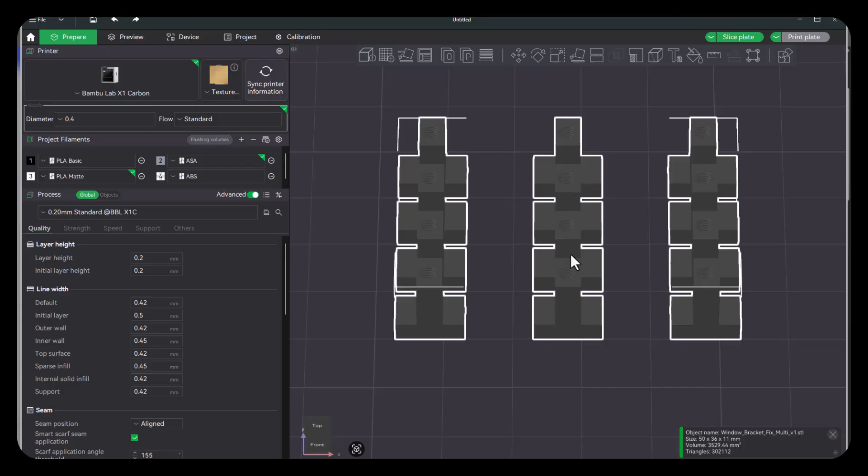There's different ways to look at this, but I'm going to zoom into it and rotate this so we can see what that looks like. So there's the 12 items, and I've got them selected right now, so it's kind of hard to see. I'll unselect that. Now you can see all of this.

Now, the thing that I did, since he was recommending PLA, I decided to go ASA, and I knew I needed a little bit more precision with these, because if you're new to 3D printing, threading, when you try to print threads in this orientation, it's not necessarily the most precise print. So you'll see in James's article, he's talking about using a tap to make these threads more precise, and it works fantastically, by the way, and I'll go through that in just a minute.

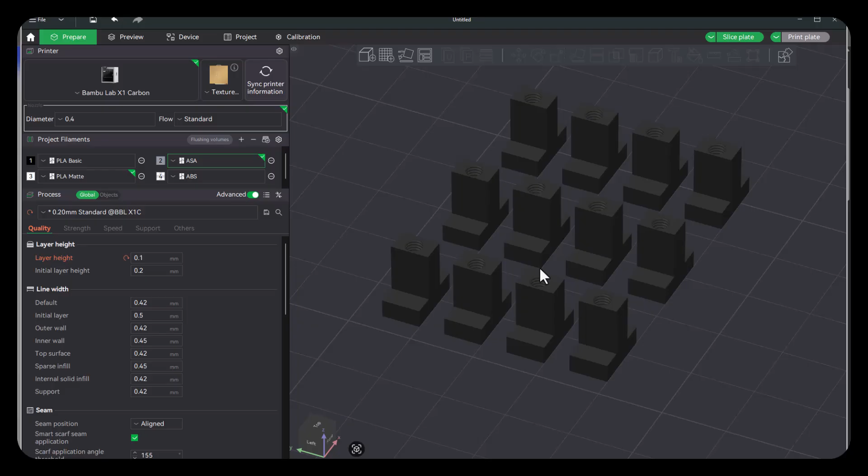One of the things that I did is I changed the layer height here to 0.1. That's usually the lowest that most printers are going to support. Your printer may vary, but I changed that one, and also I decided to use ASA for my filament, so you can do that by selecting the object, right-clicking on it, change filament, and I chose my ASA.

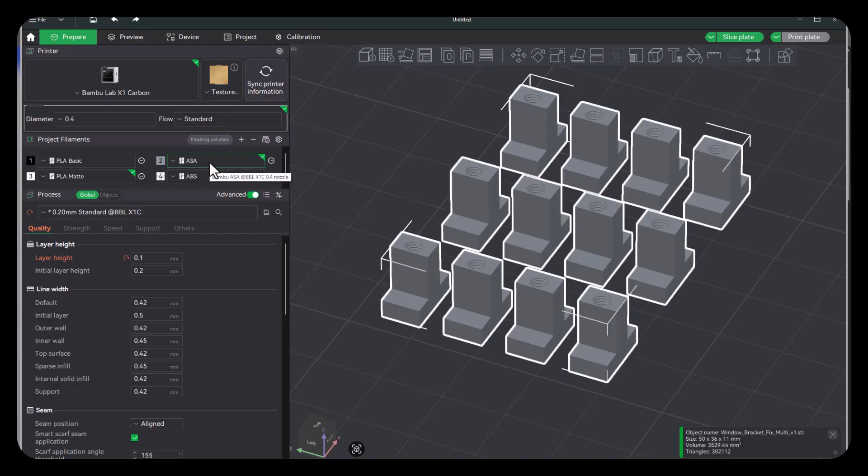Now I have what they call an AMS. It's an automatic filament feeder system, basically, so I can have 4 different spools of filament, and you'll see here I've got a PLA basic in black, a PLA matte in white, a gray ASA. I chose to use gray for that, and notice that my model changed once I selected the filament I wanted to use. That's more representative of what it's going to actually look like when it's printed.

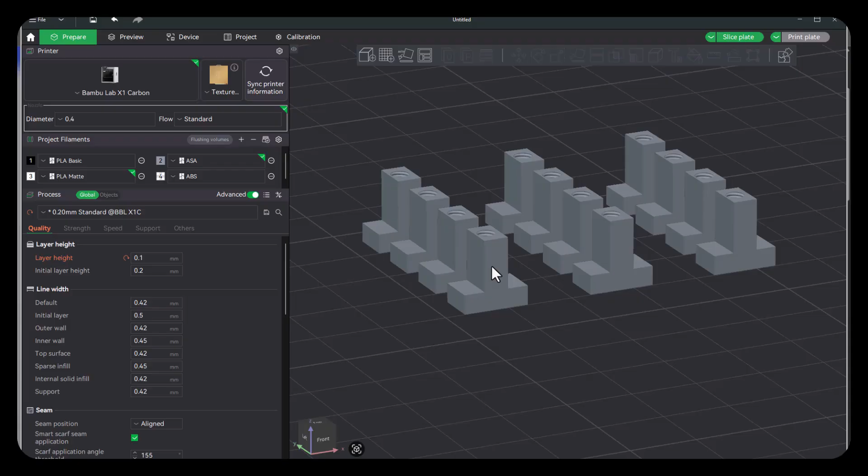I thought gray would be a good color because these struts are like an aluminum, so I thought that would go good. These are going to be tucked inside of the struts anyway, so it's kind of a moot point, but just aesthetically, I thought that would match a little bit better.

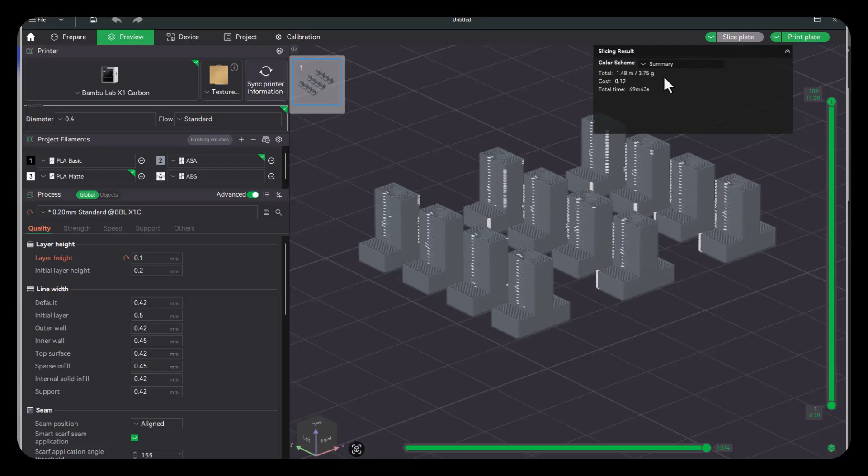Another thing that I did is I noticed that when you slice this and you start looking at the infill, is what they call it. Let me change this scheme from filament to, I believe, a summary here, or line type. There we go. When I look down at the infill here, it wasn't quite as much as I thought it needed to be, so I increased it just a little bit to make it a little bit stronger inside.

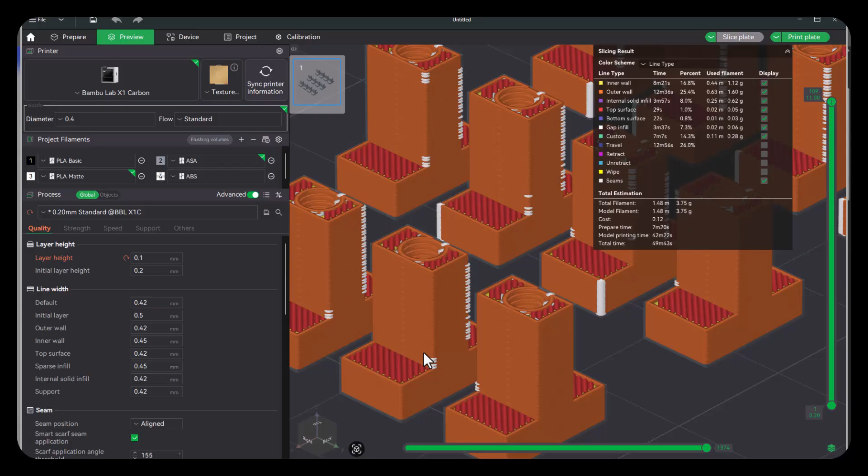I'll go ahead, and the other thing I did is notice the white that is showing up here. By default, depending on which software you're using and all, this may randomize. So one of the things I did was to come over to, let me see if I can find this here real quick. It's in the quality. Yeah, there it is. This is called the seam, and by default, most of these programs will use aligned.

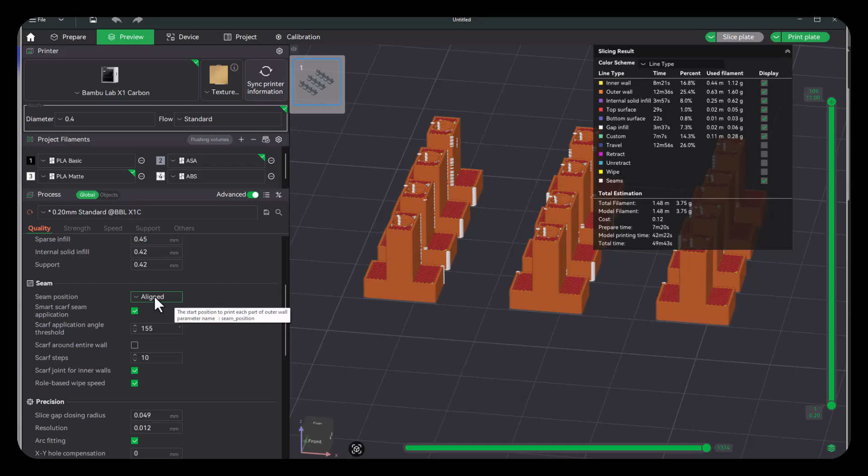So I changed that to back, and what that means is it's going to move it to the back of the plate. So if I'm looking at my plate, this is the front of the plate, and this is the back of the plate. So what I like to do is to select the model.

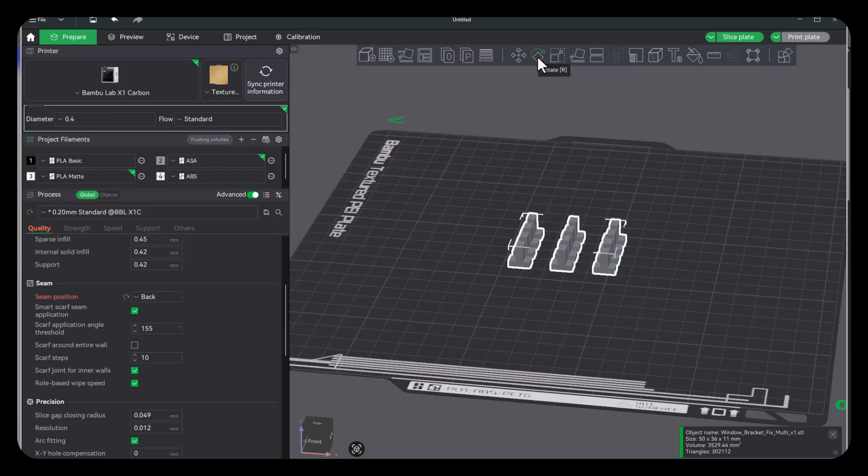Let me go back into prepare. I'll select the model, and then I will use this rotate here, and I'll grab the blue one and rotate it 45 degrees and snap it to 45 degrees there. And then if I slice it again, this will all make sense in just a minute.

What you want is the seam to be on the back side of the plate, so all the imperfections will be at the same place, and that'll help the look and feel of it a little bit. So you'll see a little bit later when I show you the actual prints of these, they're all uniform in exactly the same place. So that's just one little minor detail to look at.

And then once you're happy with this, you can just print the plate, and that'll kick off the printer to do that. So I think that's probably it.

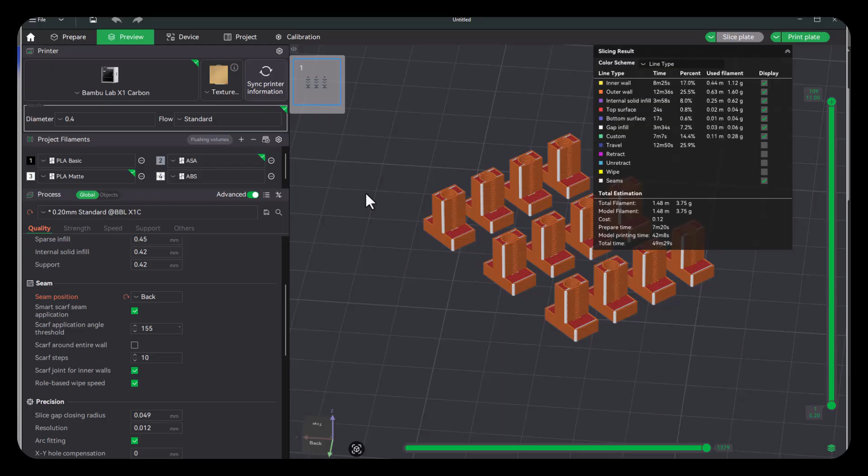What I'm willing to do also is to open up the 3MF file just to make sure that I showed you the right settings. These are the ones that I saved just so that I wouldn't forget all the changes that I made. I'll point out the changes here once it opens up. It'll take a minute to load.

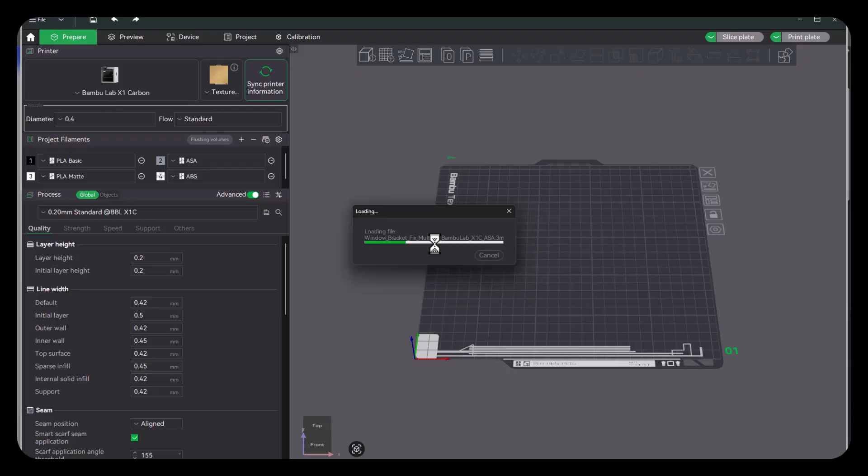Okay, so as it loads up here, you'll see a few of those have changed. Everything that I changed is marked with a different color, which allows you to revert back to the original settings. Like I was showing before, I changed the layer height and changed the seam position to go back. That's pretty much it.

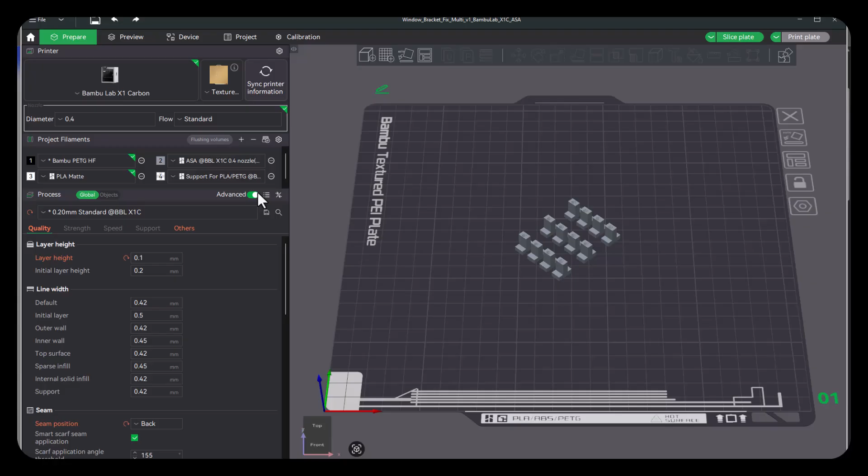Also, I used ASA here, so you'll see that it's already grayed out on that. You may have to change that for your configuration, your setup, especially if you're using an AMS. You'll have to right click, or click on the model.

Excuse me, let's go back to prepare. Right click on that and change the filament to whichever one you want to use, depending on how you've got your AMS loaded up. That's pretty much it, and that's kind of the mystery part of it. A lot of details I'm probably leaving out there, but I thought it might be nice for some of you to see the process and how that works.

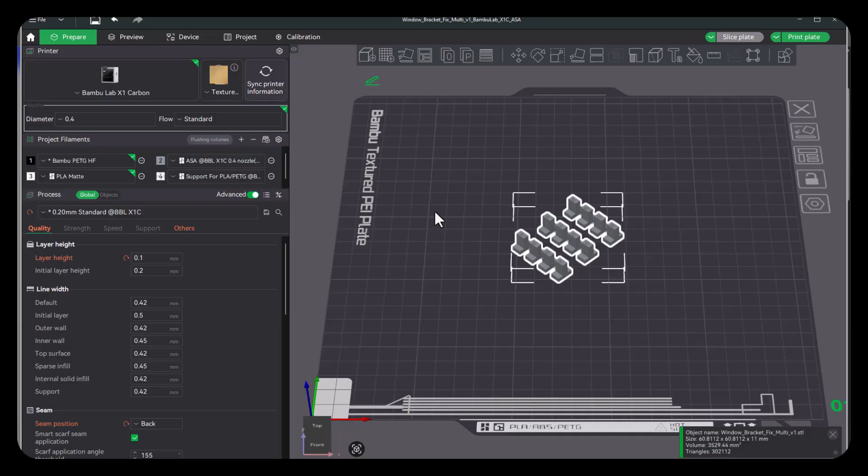So let's flip back over to the article. He mentions a few different tools here. He linked over to some blue thumb screws that he used, and if you like that style, that's totally fine, you could grab those. One of the things to mention is that he's recommending M3 by 16 millimeters.

I believe that's a good length based on what I'm seeing so far. He said you might be able to go a little bit shorter with these, but he had not tested anything below like 12 millimeters. I think he went with the 16, and I think it feels right because you need room.

The way this is going to end up is that there's going to be a screw, essentially think of it as a tightener for your strut's position. You need to be able to have it long enough to reach your thumbs around it, your fingers around it, to be able to tighten and untighten that screw.

I went with a different set. Let me just go over here. I went with black on mine because I wanted it to be a little bit less pop. So I found these UXL ones. They're really designed for graphics cards or computer cards, to screw them down onto a motherboard, but they work just fine in this situation. And there's 10 of them for $15.29 that I got.

He also mentions an individual tap. My recommendation is if you don't have a tap and die set, you probably want to just go ahead and get a set instead of buying individual taps, because once you realize the power of being able to tap your own 3D prints and get the threads just perfect, either inside or outside...

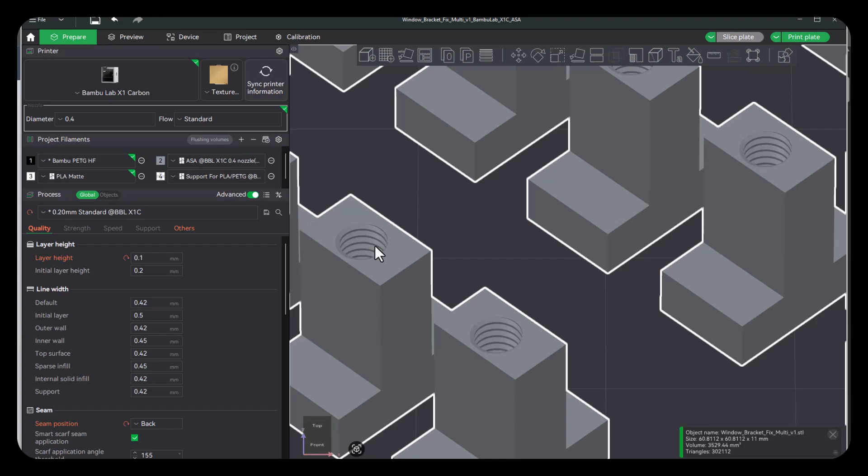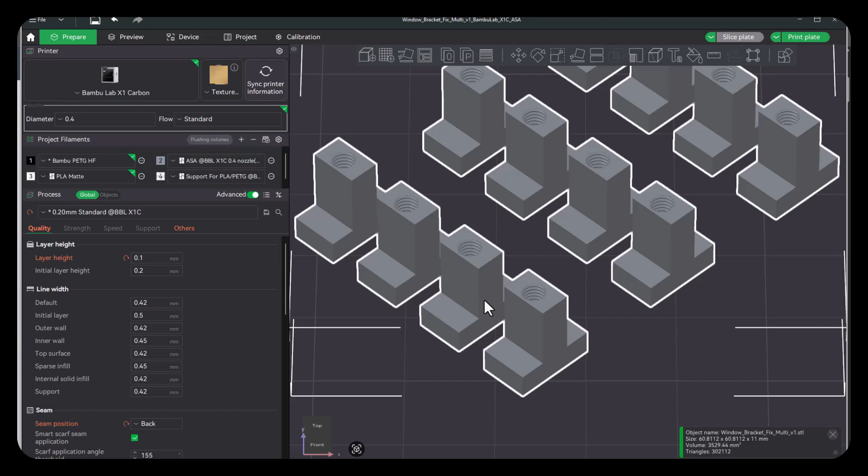When you twist that tap in, it just works great. So I held these pieces and tapped into it. You want the tap to go all the way through from top to end, so the threads are all good, because at the end of the day that M3 screw, thumb screw, is going to go in this side, come out the other side, and go up against the aluminum strut to hold it in place. So that's going to work great - I noticed the threads are just absolutely perfect after using the tap.

I think that's probably it. I did go ahead and get a center punch - James talks about it in the video - it allows you to dimple the place where you're going to do some work on the struts, and this one worked really great. I like the handle on it - you can actually turn the handle to change the strength of the tap, so it's got adjustable tension. I thought that was a nice one and not very expensive, so it was nice to have that. I went ahead and got that piece.

Everything else that he lists, I either had already or didn't feel the need for. For instance, he mentions a nail setter punch - I've got one of those, but I think you'd be fine using just a straight screwdriver. The other thing you'd need is a Torx screwdriver set if you don't have one; I had one already.

You're going to want to hand tighten these when you use that to loosen the struts to take them off the windows, and when you reinstall them, you don't want to go too tight with these things. So hand tightening is preferred over using a drill or a power screwdriver.